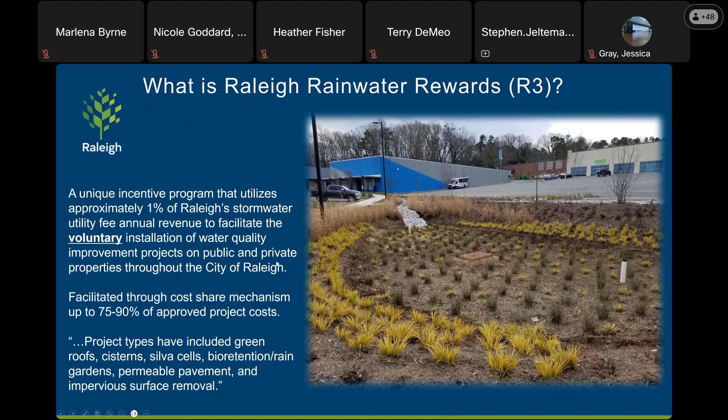We've also recently approved a subsidy program to assist applicants who are low income or affordable housing, or places of worship and nonprofits that serve that immediate community and own the property. Even more recently, the city of Raleigh has been reaching out to third-party support for gap funding, voluntary project support, and incentives to grow this program and its financing.

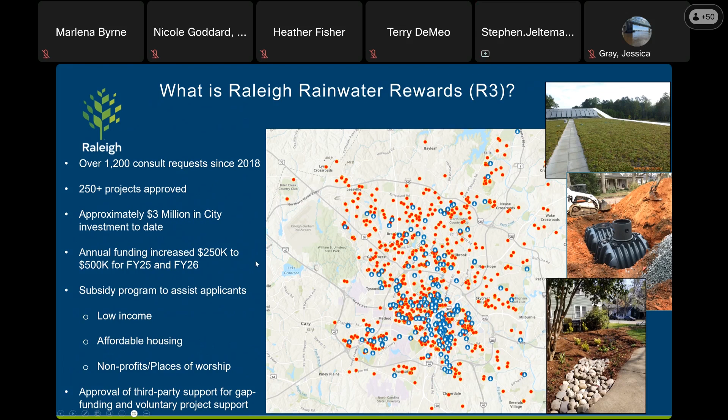Some program elements - at a high level, who is required or eligible and how these programs are successful. An applicant must be part of the city of Raleigh. We do not support projects outside city limits using public funds, which makes sense. The property must be within city limits.

It's not an independent do-it-yourself kind of thing - you do consult with city staff. We provide guidance documents and our minimum design criteria. We support, help, and lead property owners through the steps to complete a successful project, and that's a requirement we perform. We need eyes on it - even a top-end engineering firm participating in this program needs a consult with our city staff.

Part of these projects involves our due diligence to make sure they'll succeed. One way is making sure, especially in Raleigh and the Piedmont, that water will actually infiltrate and that these are built correctly, so we ask for basic infiltration testing when they submit their application. I can get into more detail as we progress through different project types.

We coordinate with city staff on project cost effectiveness, utilizing the state's SNAP tool to calculate nitrogen and phosphorus values. Once the project is installed and completed, we verify it is correct and good, then initiate a reimbursement. But before that even occurs, the city enters a legal agreement with the property owners with a maintenance term, typically anywhere from 5 to normally 10 years, to make sure the device continues to accomplish what it was intended to.

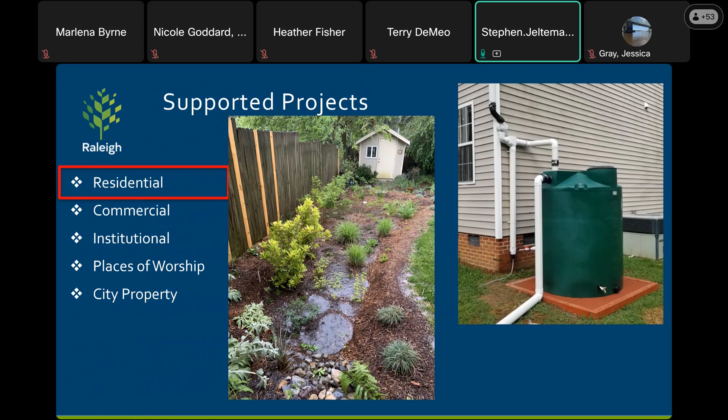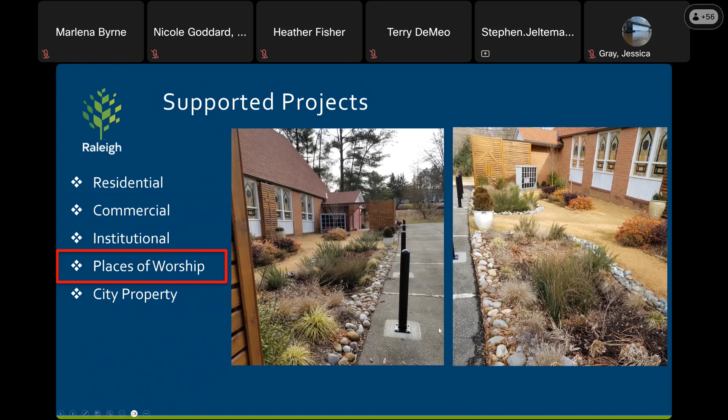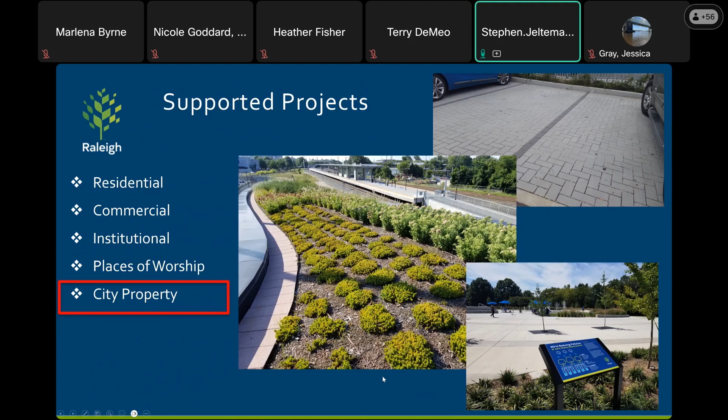All right, so depending on my time here, I'm just going to highlight some projects and show some pictures and describe them. I think we have plenty of time, Stephen. So go ahead, please. Great, I appreciate it. All right.

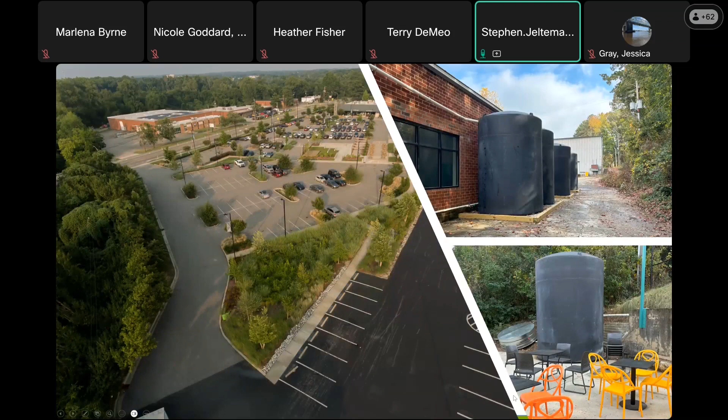Next project - this is one of our highlights, I would say, with a commercial entity and a good partnership. This is off Capitol Boulevard, an old area of town with a lot of impervious surface. This property owner contracted with us, and as you can see on the left, it's got a lot of green sort of islands of infrastructure - a large network and series of bioretention basins. Previously this was just a gigantic asphalt lot that discharged to an impaired water body within Raleigh.

They worked with us over the space of two different events or phases to not only build large-scale bioretention basins, but also small-scale islands to intake surface runoff, as well as in the backsides of their buildings, they now have installed a series of large cisterns that also take roof runoff. This has drastically reduced volume and pollutant loading in that area, especially to an impaired water body located in downtown Raleigh called Pigeon House Branch.

And on top of this too, I would also note, through us, we have a series of signs and educational placards that when people are going to this place, going to the brewery and sitting out on their patio, they have this education outreach, and it's very forward facing, the partnership that we have with them. It's been fantastic.

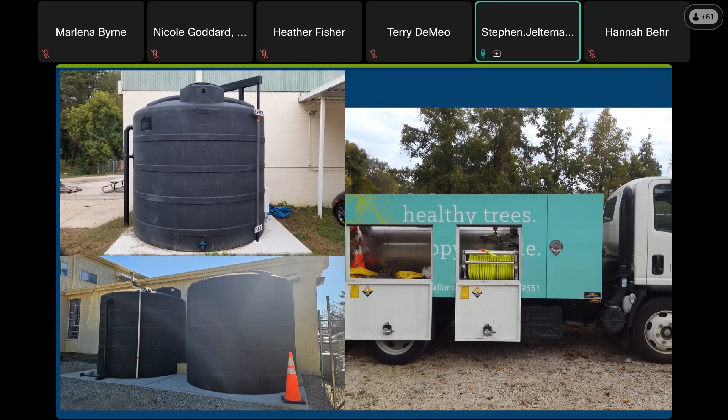All right, and that brings me to the end of it. I know, and correct me if I'm wrong, Nicole, the questions are going to be at the end here. But please, if there's any interest, or if you do work for a municipality, please do not hesitate to call or reach out. I'm typically very receptive as best as I can, and I'd be happy to go into more detail about this program with you.

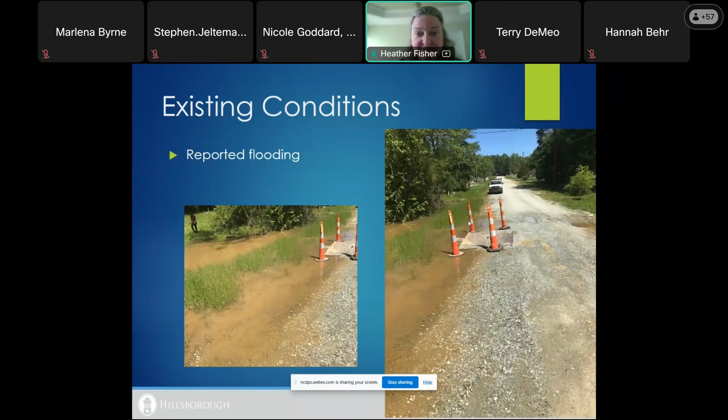I wanted to give you a little more background on the street and development itself. As I said, it was on the outskirts of town, so not super urban, more like a suburban rural setting. It was developed in the 1970s as a mobile home development, and at this point, in the mid 2010s, the homes were fairly run down and poorly maintained.

Habitat gradually bought out those properties, found the families other places to live, and then their plan was to redevelop the entire street. Habitat was already looking at innovative solutions, so adding on green infrastructure was something they were excited about.

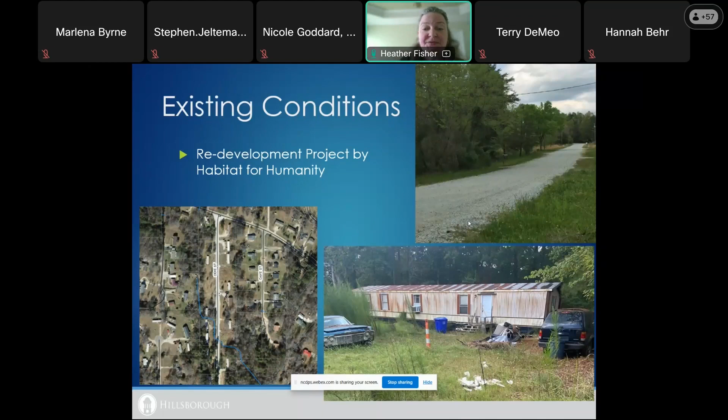From the town's perspective, in addition to working on a community project with Habitat, we were also looking for stormwater retrofit projects. We are in the Falls Lake watershed, subject to the Falls Lake rules, and the existing development rules require us to invest a certain amount of money each year on retrofit projects that will reduce nutrients in our jurisdiction.

This process was just getting started, and we were looking for opportunities. The idea that we could invest some money into this project, find grant money, so we're leveraging our investment, and then we're providing benefits to our citizens here in the upper part of the watershed while complying with the Falls rules and providing benefits downstream.

So the ideas we came up with were to take a green street approach, but within the context of more of a suburban rural setting. The goal was to find opportunities for bioswales, grass swales with check dams, rain barrels, and native plant gardens. These numbers are what we ended up accomplishing at the end.

The project was very focused on bioswales. Bioswales are similar to bioretention cells. They're meant to fit within the road right of way, and the idea is that they are an alternative to stormwater conveyance—an alternative to an underground pipe, to curb and gutter, to a ditch.

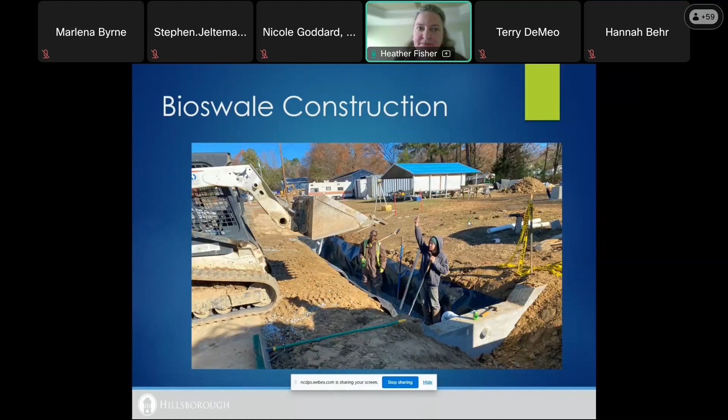So how did we get this done? We had a great team of partners, and I'll give you a sense of each one. Piedmont Conservation Council led the grant seeking and grant administration, and we've worked with them in the past on nature-based projects.

They are RC&D, a resource conservation and development organization. They work in 10 counties across the Piedmont of North Carolina, and they focus on projects related to agriculture as well as restoration in urban or rural areas. Stormwater and green infrastructure fit within what they do.

Habitat was an amazing partner. Since we have a little more time, I'll make sure everyone understands who Habitat is. I'm sure you've heard of them, but who they are and how they've evolved is very interesting. They provide adequate, affordable housing to underserved individuals and families. The people they serve are home buyers.

So in order to buy a house, they perform sweat equity - they have to provide volunteer hours to earn that sweat equity, and they're also required to make home payments. Habitat funds the home building through donations, grants, and volunteer labor.

In our county, Orange County, they've been working there for 35 years. They've built 300 homes, and they built 25 homes along Odie Street. So Habitat has built an extensive volunteer network.

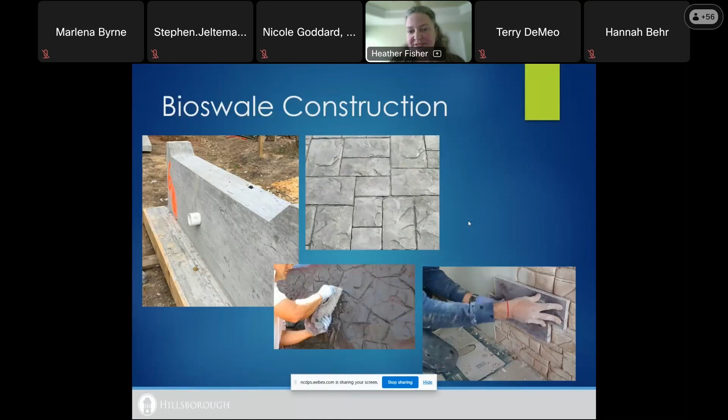Now on to construction. Construction occurred while Habitat was still finishing some of the homes. We waited until they were at that stage because, as some of you probably know, bioswales can get easily clogged by sediment, and we needed to be able to control the sediment runoff from construction.

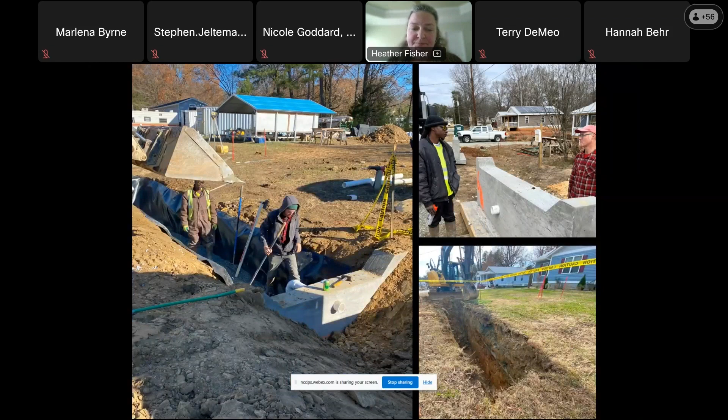This is showing one of the bioswales before the mulch was laid and the plants were planted. Hopefully you can see the gray is the specialized soil media.

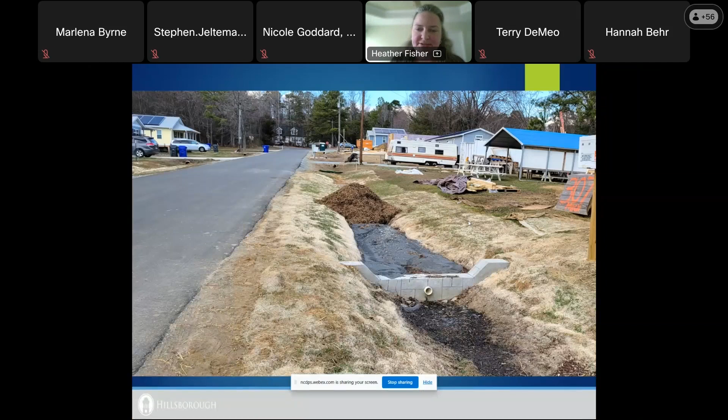Another education event - and then in order to outreach to that wider audience, we held a tour and networking event. Here we were targeting professionals from affordable housing, as well as the stormwater management and environmental fields. We had a great turnout for this, and it was a lot of fun. The hope was that what we could provide in terms of lessons learned and process could make it easier for others to take on a similar project or come up with something even better.

And lastly, for the wider audience piece, we released a promotional video this fall. It tells the whole story, and it's about 11 minutes long. Our hope is that it can be widely shared and provide a resource. This is on YouTube, so I encourage you to check it out.

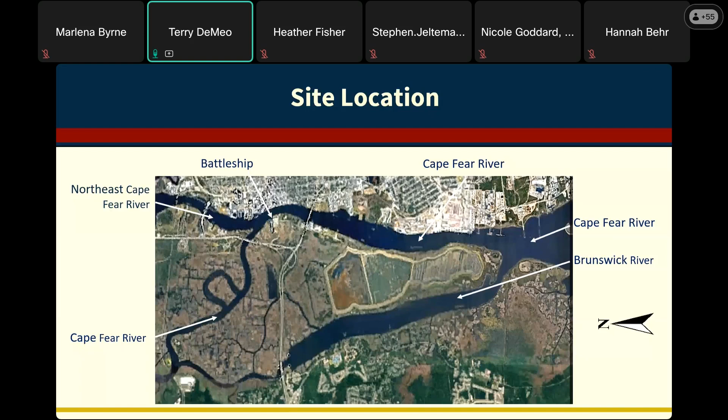What that means is that by statute, the ship receives no annual state appropriations. We must pay all of our operations and maintenance by visitor receipts, gift shop sales, events, and rentals.

In 2017, we asked the Army Corps of Engineers to conduct a hydrology and hydraulics review of our site. And even with the results of that recommendation, the leadership decided to move away from hardscape of dikes and hardened channels and catchments, but instead selected some nature-based options in discussion with NOAA.

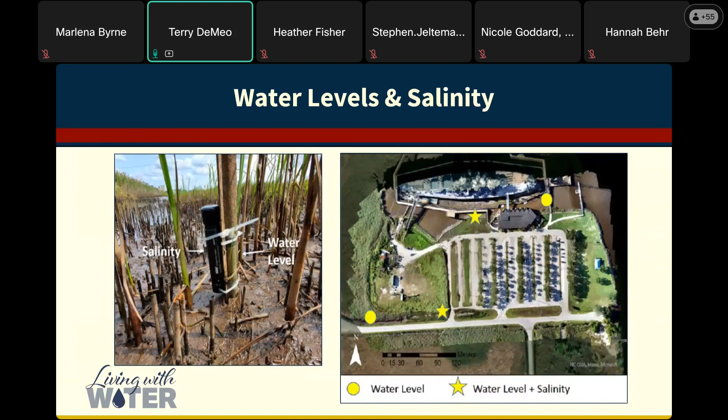So about this time in 2018, 2019, I was speaking to a lot of community groups and applying for grants for our tidal flooding issues. And I found that the flooding images didn't really grab my audiences. So I became curious and I started thinking, was our flooding really worsening?

Looking at the last full decade, it shows that nearly half of the days in the year 2020, our site was flooded, of course, forcing visitors to drive, park, and walk through tidewater just to enter the visitor center.

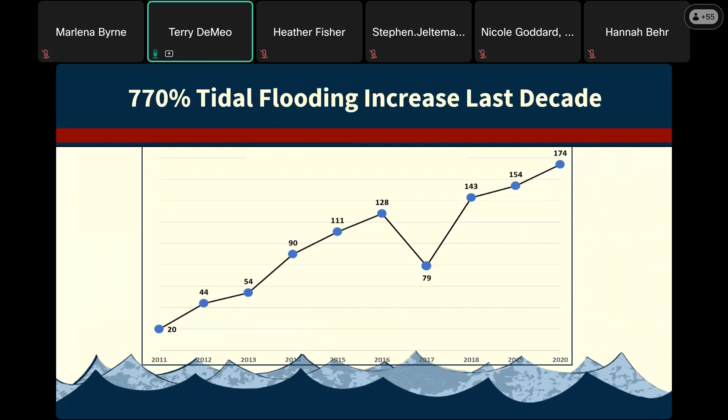So the Living with Water project was implemented through a $6 million and some change funding package. I put together a package of grants, 4 main grants. The Department of Natural and Cultural Resources contributed some repair and renovation funding. We received a direct appropriation from the state. The Battleship Commission committed funds out of their reserves, and we also collected donations from individuals.

The Living with Water kickoff meeting was in December 2020. Construction began in February 24, along with our groundbreaking event. We had about 55 stakeholders and supporters attend the groundbreaking event, including state and local elected officials and representatives of all of our funders. We also had a King Tide event that showed up for the first day of construction and for our groundbreaking. So literally, that's what construction looked like on the first day there.

So the Living with Water project is still in construction, but it has 5 main elements: a living shoreline and shoreline restoration, a wetland and tidal creek restoration, and parking lot improvements, including the bioswale that you see bisecting our parking. The bioswale, of course, is to manage the stormwater runoff from the parking lot.

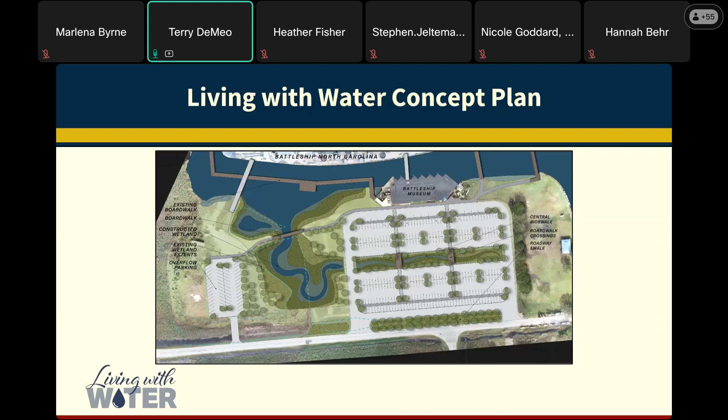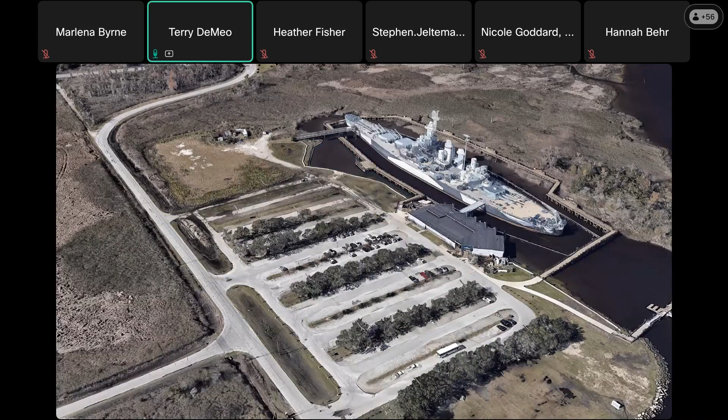So what we have done is we have restored about 800 linear feet of living shoreline, and some down here as well, and around our tidal creek.

We have removed about 2 acres of impervious parking and restored that area with wetland and tidal creek habitat. We're in the process of elevating the remaining parking lot area above the usual tidal flooding level, including completing the bioswale running down the middle of it.

Because we needed to remain open during construction, we divided our parking lot construction into 2 phases. The first phase, closest to the wetland area, is now open and receiving parked visitors and staff vehicles, and we're now working on this piece here.

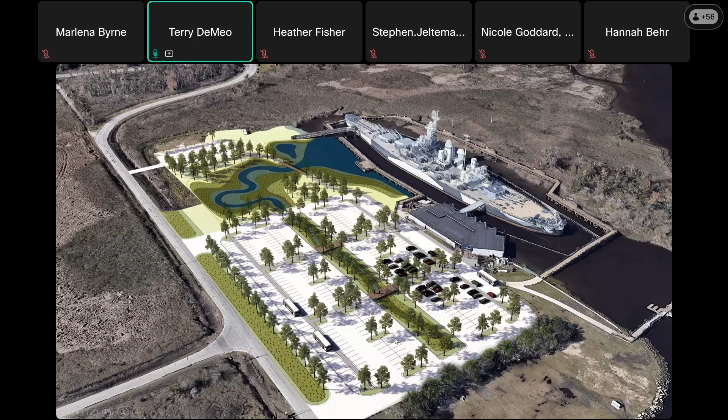So the 4th project element is our multi-year project monitoring with UNCW and NOAA NCOS. This is contributing to an academic and agency knowledge base of the resiliency benefits of green infrastructure and nature-based solutions. We also have project photos taken twice a month, creating a visual public record to accompany the monitoring.

The 5th element of Living with Water is education and outreach. This includes our interactive GIS-based story map, accessible on our website. Living with Water was also featured on an episode of the Waterloop podcast, so that's been out there on the podcast airways.

For the 5th year, we're hosting the junior and senior high coastal physics and engineering students from the Cape Fear Academy. We're doing that tomorrow.

We're also in the early stages of creating a living laboratory at the battleship site in collaboration with UNCW and the North Carolina Sea Grant, to support rigorous scientific research and provide opportunities for place-based learning beyond the Living with Water project. This living laboratory is intended to stay in place and grow over time into the future.

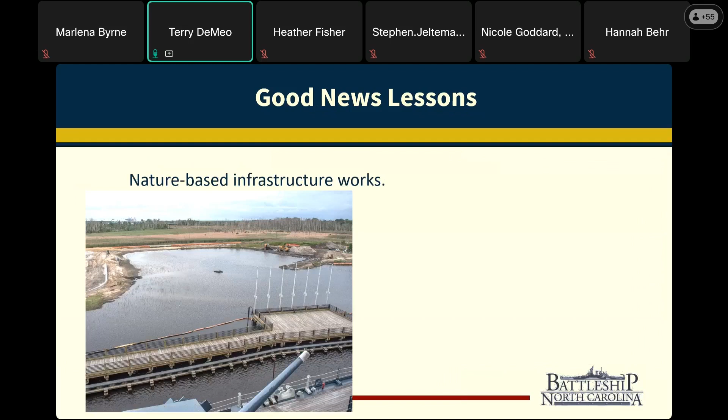Our monitoring and photography program have created a rich project legacy. And finally, Living with Water, as I mentioned, has enjoyed fantastic media coverage and project interest. So the nature-based solutions really offer hope.

Some of our not-so-good lessons: our permitting process seemed really long and contentious. We found that regulators didn't seem as comfortable permitting nature-based green infrastructure as they did permitting bulkheads and docks down here on the coast. The construction was not permitted in the living shoreline or wetland areas during the moratorium, April 1 to September 30, in order to protect juvenile fisheries.

We did receive a moratorium relief in late August and were able to plant marsh plants in early September, but this was followed by a really rough autumn of heavy rains and many king tide events. So our marsh plants look a little rough these days.

As well, our permit requires 90% survivability and replacement of our marsh plants for the next 3 years, which is what I understand to be a very high percent of survivability for recently installed native plants.

And we've had a lot of discussion around our Phragmites prohibitions. All excavated soil material could not be used on site; it had to be removed and disposed of. All new soil had to be verified free of plant, root, and seed stock. No more than 5% Phragmites cover is allowed to intrude into the new habitats for the next 3 years. This is particularly difficult to achieve and maintain, given Phragmites is a real aggressive and invasive species.

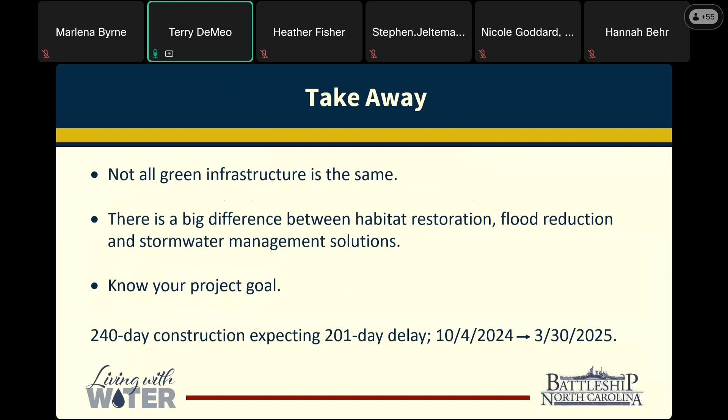So I had one other—trying to get through this—one other set of takeaways.

Not all green infrastructure is the same. There's a really big difference we have found between habitat restoration and flood reduction, and stormwater management solutions. So I would encourage other areas, local governments and communities to be sure you're on the same page with your design and engineering firm regarding your project needs and goals. To circle back, NOAA's early field investigations back in 2018 discovered that tides, not rain, was causing our flooding issues, but we have ended up spending more time and money constructing stormwater solutions than our nature-based and tidal flooding infrastructure.

So thank you so much for the opportunity.